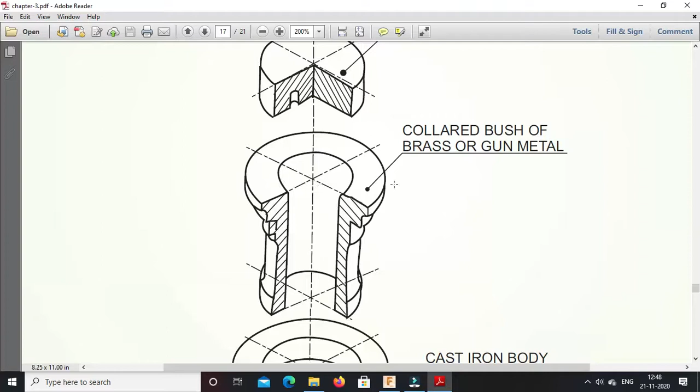So the next main part is the bush. Now in order to create a bush, generally a bush is a cylindrical part. If you observe, it is a cylindrical part having a central hole in it.

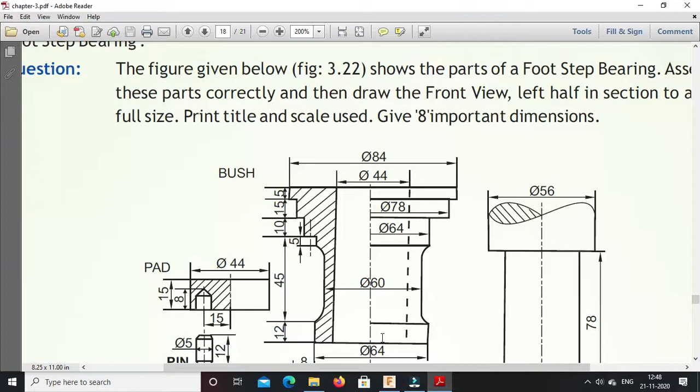There are two ways for creating this bush. Either you can use the step by step extrude option, similar to what we used for creating the body part - draw two circles, extrude it, then again draw two circles as per requirement, then extrude it again. So you can prepare the bush that way, with the diameter changing: 64, 60, then 64 again, then 78 and 84.

Or, if you are good with calculations, you can directly draw the half cross section of this bush and, using the revolve option, revolve that cross section along the vertical axis. Then you will directly get the bush in a single step, but for that you need to calculate every dimension - the thickness, small distances, vertical distances, and so on. So it will be difficult for me to explain that way, so I will use the extrude option for explaining purposes.

So we will go step by step. The initial diameter is constant at 44, the outside diameter for the base is 64, and the height is 12. Using the extrude option we will create the bush.

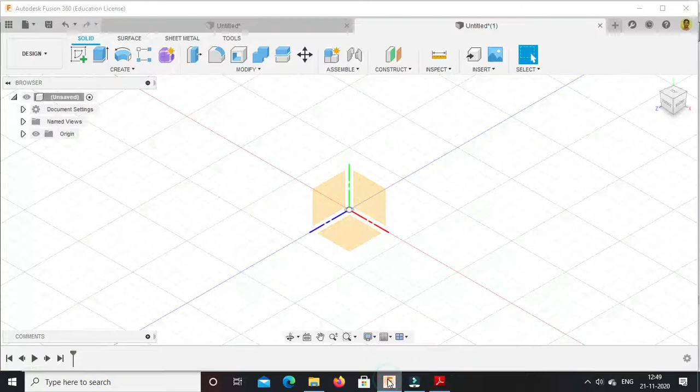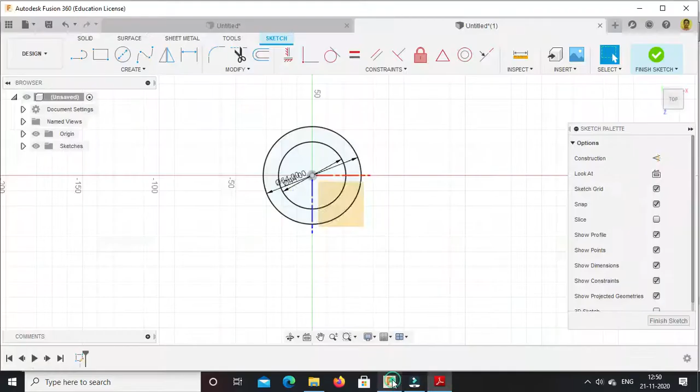Select this plane, go to create sketch option, select center diameter circle 44, enter, again draw outside diameter 64, press enter. The thickness is 12 for this part. So extrude it using dimension 12.

Press enter, then select this face, go to create sketch mode. Now inside diameter is 44, outside diameter is now 60. The thickness - since this 64 diameter goes up to this point, this much is 45 minus 5, so it is 40. So outside diameter 60, inside 44, and height is 40.

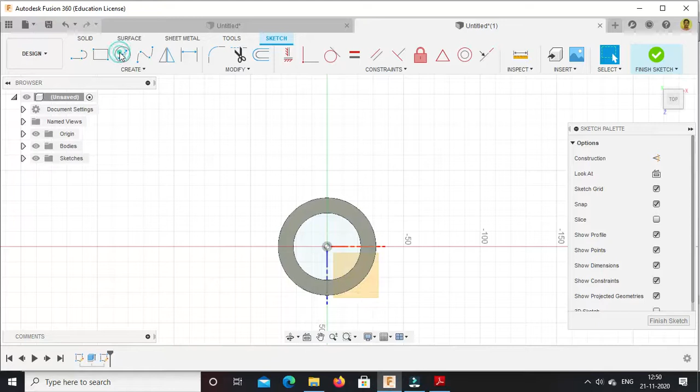So again give the outside diameter only, that is 60. Press enter, extrude, select this and 40.

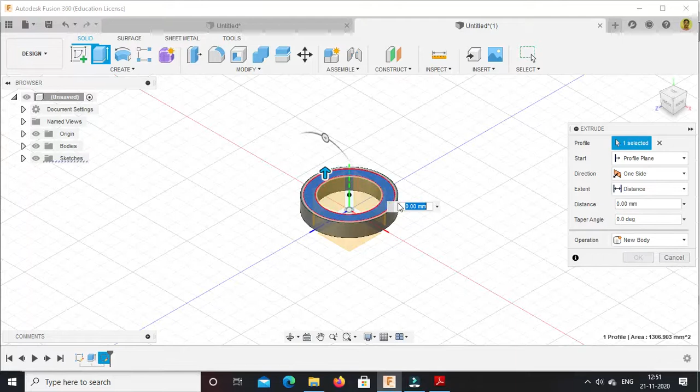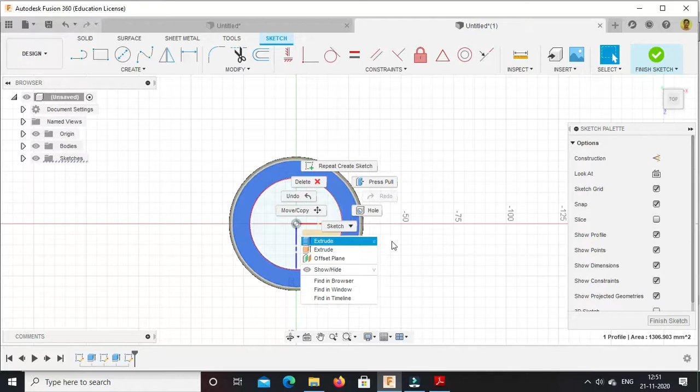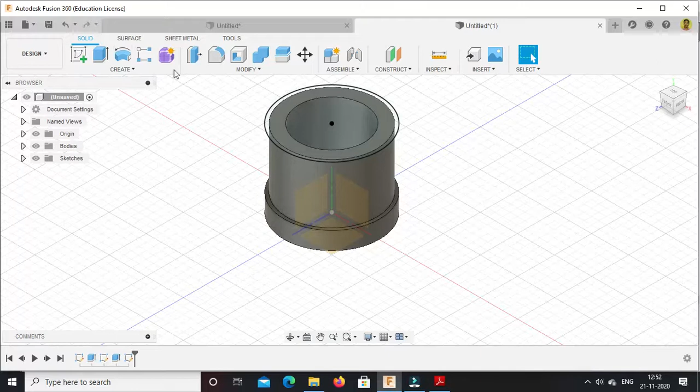Then select this face, create sketch option. Now diameter has increased to 64, inside is 44, and height is 10 plus 5, that is 15. We're already in sketch mode, so just select center diameter circle, 64, press enter, finish the sketch mode, extrude. Now select this portion and this portion also, and enter the height required, 15, press enter.

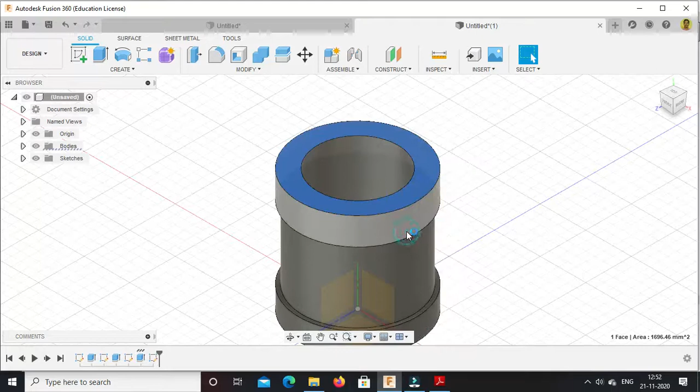Now the next one is 78 diameter with height 15, inside diameter is 44. So 78 by 15. Create sketch, 78, finish this sketch mode. Again extrude these two cross sections - you need to select and hide - enter 15, press enter.

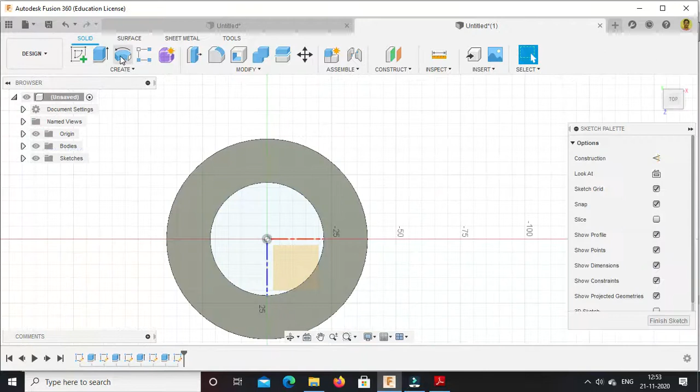The last part has diameter 84, inside 44, and thickness 5. Enter, finish the sketch mode, extrude this one with distance 5, press OK. So finally we have created this bush where the inside diameter is constant and the outside diameter is changing.

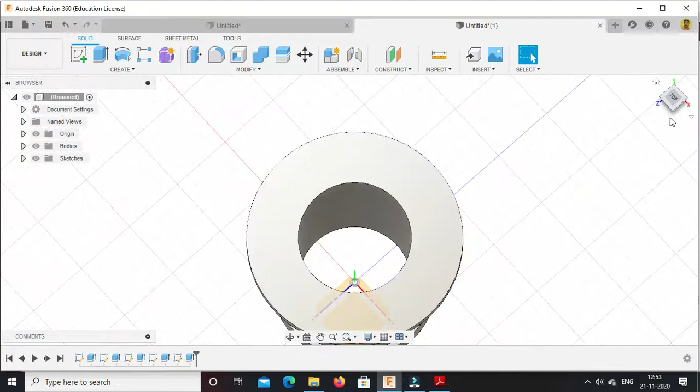So we created it using the extrude feature step by step. You can also create this using the revolve feature, but for that you need to calculate the exact cross section of the bush. Now the next part is, as we created one hole for the body, we need to provide a similar extension on the bush.

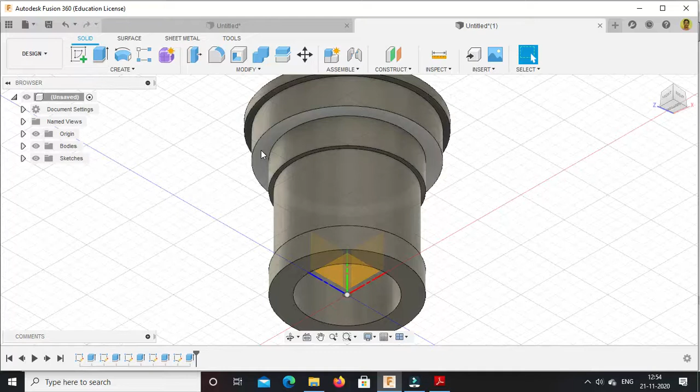The diameter is 5, so where do we need to provide it - it should be over here, with diameter 5 and length 10. So on this second face we need to draw. Go from the bottom, select this face, create sketch.

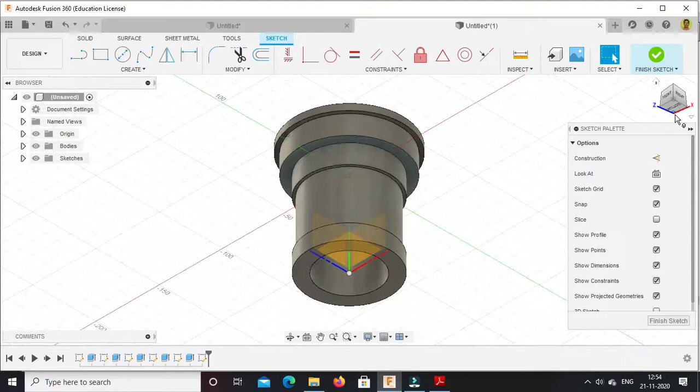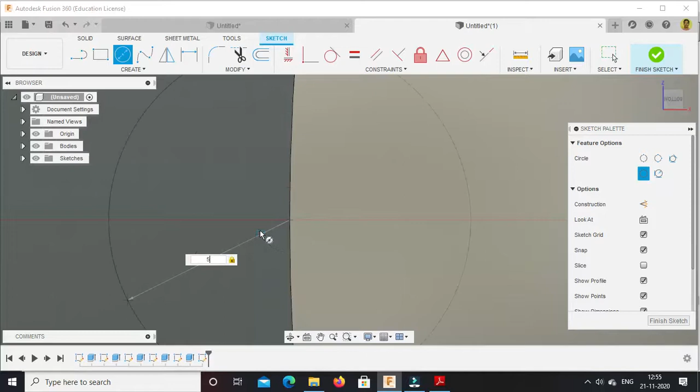Now we want to create it on this side, as per the orientation of the body. Select this point over here, just draw a circle, diameter is 5, press enter, finish this sketch mode.

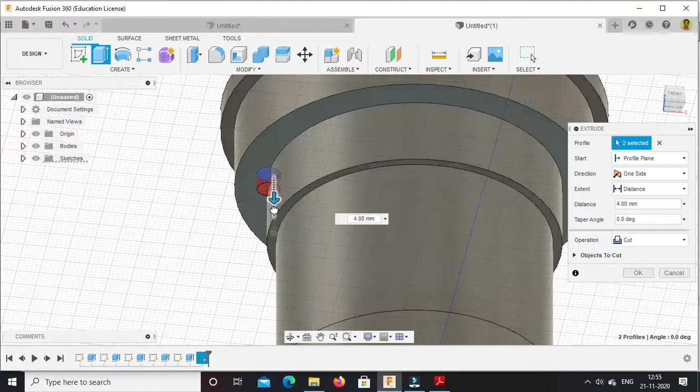Using extrude, select this and this, drag it, use operation as a join because we want it as an extension, and height should be 10, press OK. Now this is the extension that we have provided.

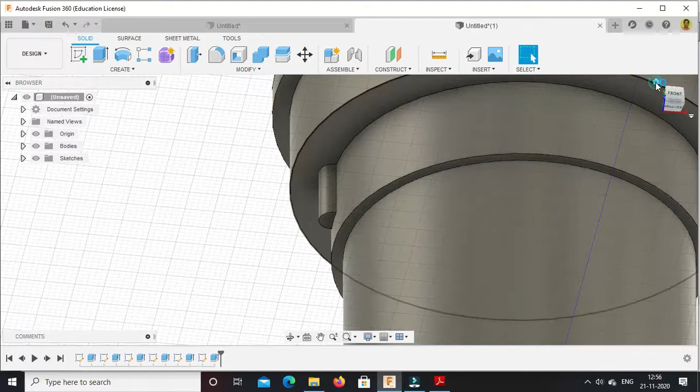Okay, so this extension will get fitted into the body which we have created, drilled hole in the body, and it will get locked inside that, so it will prevent the rotation of the bush in the body. Okay, so we have finished this bush. Now

next part is we will create this shaft. Okay, so shaft is simple, rotational symmetry is there, so you can prepare it using revolve option also. So diameter is 44, height is 78, again this 56 diameter is there, and length is not specified here as it is not expected, you can keep it as 20 also. Okay, so we will draw this cross section and using revolve feature we will create the shaft.

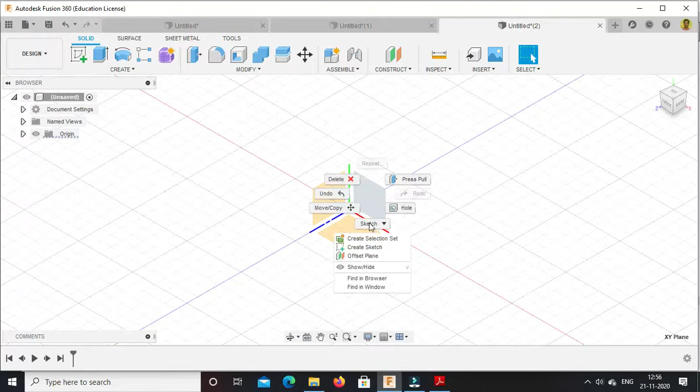Okay, so again go to next window, we will select this vertical plane as we are using revolve feature, create sketch. Now starting with this point we will use line option, so using line command start with this, so the diameter is 44, so this much width will be 22, then height is 78 for the shaft,

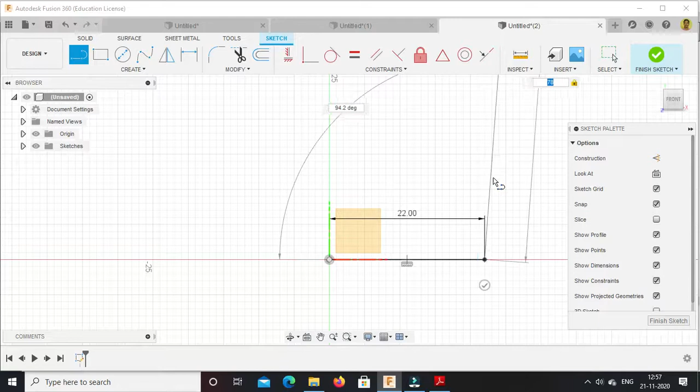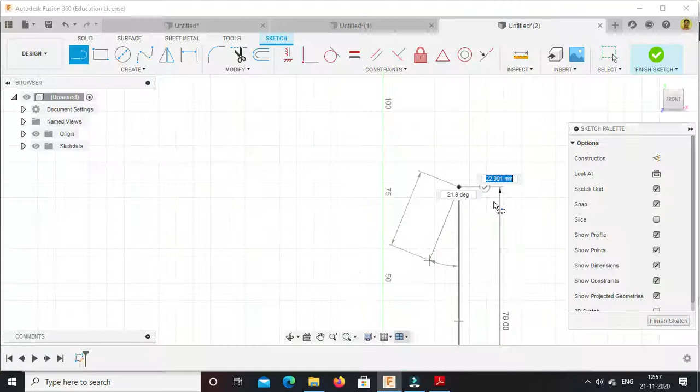now again diameter is going to increase. So here it is 56. So radius is 28, I think. Okay, so 28, we have already done a distance of 22 here. So 28 minus 22 is 6. So we will move on the outer side or outward by distance of 6 mm. Okay, and then again 20 distance, press enter.

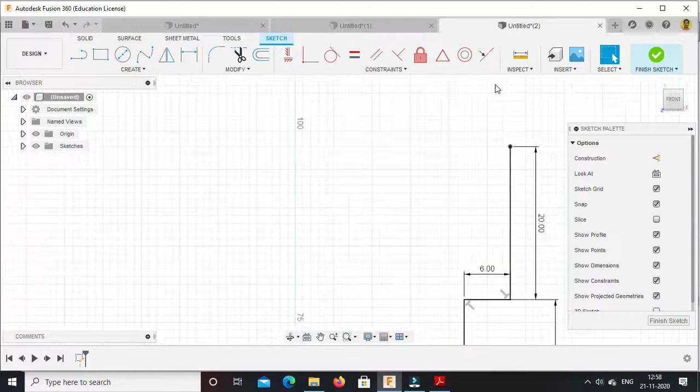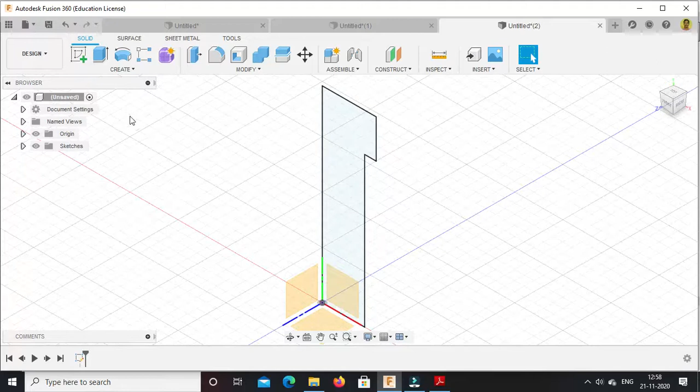Again we will use line, then we will come to this start point and then we will join this with the initial point. Okay, finish the sketch mode. Now using revolve option, cross section already selected, axis, y axis we have selected. Okay, so directly we have created the shaft.

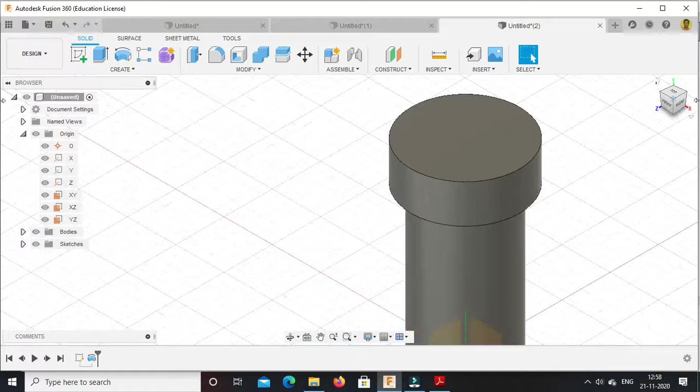You can also use extrude feature in 2 steps, first of all creating this cylindrical portion and then this cylindrical portion also. I have created this using revolve feature. Okay, the next part: we have created this body, then bush, then shaft, then this pad is remaining and pin is remaining. Okay, so we will create a pad.

So pad is simple, just a cylindrical disc of diameter 44 and 15 mm height. Okay, and on the bottom side it is having one hole of diameter 5 mm and at a distance 15 mm. Okay, thickness of that hole inside the disc is 8 mm. Okay, so we will create first of all that circular plate 44 by 15.

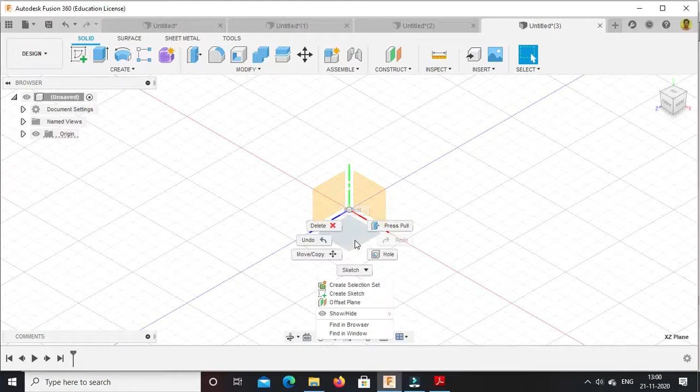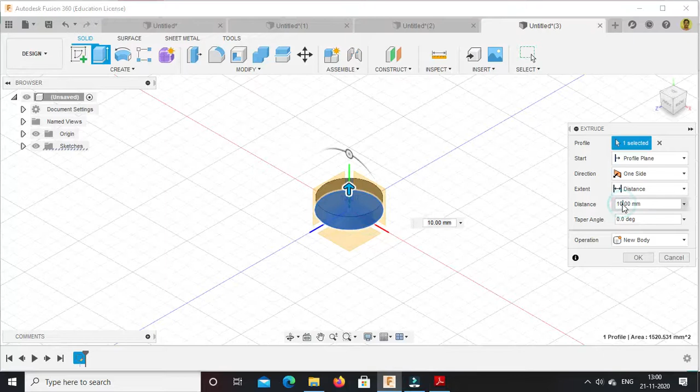Again go to next window, origin, all the planes visible. Again we are using extrude feature, so go to horizontal plane, create sketch, center diameter circle 44, enter, finish the sketch mode, extrude it by 15 mm of thickness, I think, yes, 15 mm. So 15 over here, press OK. Now on the bottom side we want to drill one hole.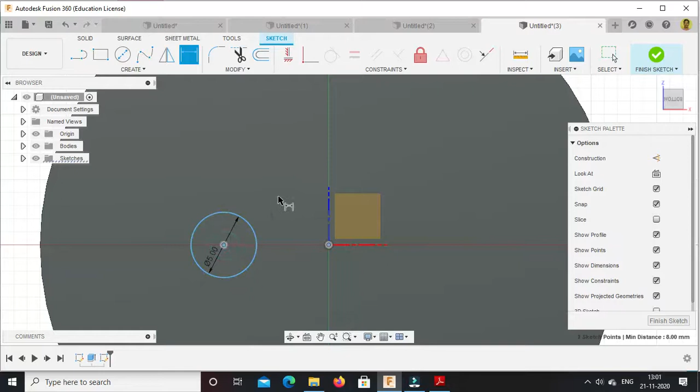Select this face, create sketch. Now drill one hole over here of diameter 5 mm, press enter. Center of that circle is located from this center to this center, distance is 15, press enter. It is correct, yes it is 15, and depth of that hole is 8 mm. Okay, so finish the sketch mode,

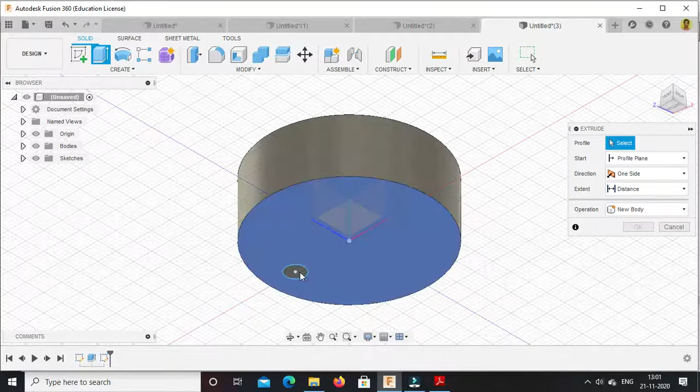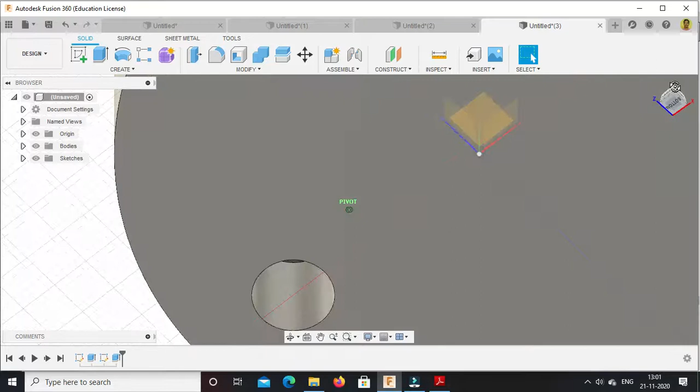extrude, use this, we want to cut it, reverse the direction, cut operation, and distance is -8. Okay, press OK. So this hole is created inside the bottom surface of the disc. So that's it for the disc, and last part which is remaining is nothing but what?

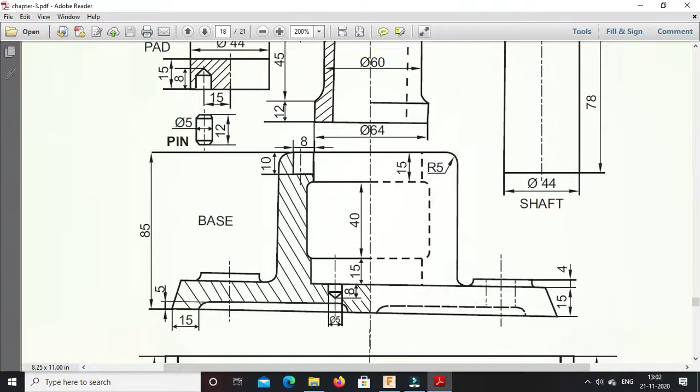Pin. Okay, so this 12 is there, diameter 5 is there, but instead of keeping this height as 12, we have created here 8, and in this body also 8. So we will make the height of the pin as 16. Okay, and diameter is 5. So just a cylinder of diameter 5 mm and length 16 mm.

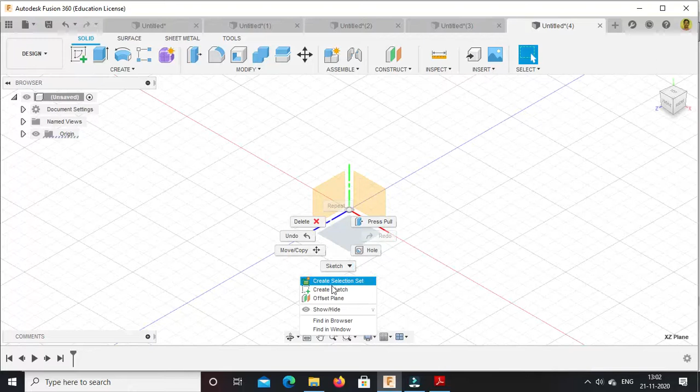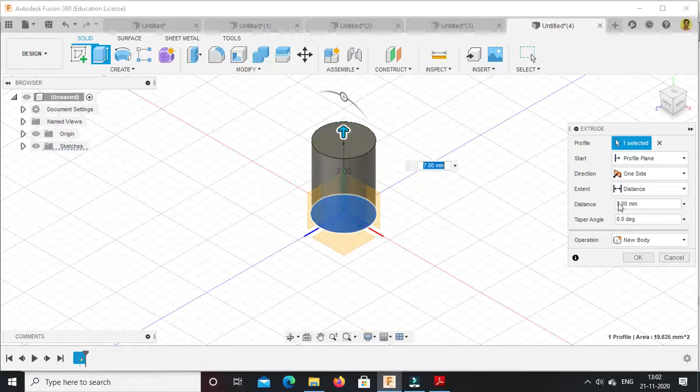Okay, so again go to next window, origin, again horizontal plane, create sketch, draw diameter of 5 mm. Here height is 16 as per the requirement.

Press OK. Now we are going to assemble these parts, not in this video but in a future video I will show you how to assemble all these parts together. So for that purpose we need to create body, or sorry, not body, component. Okay, so just keep in mind that while saving, right click on this bodies option, this body one, right click and create components from the bodies.

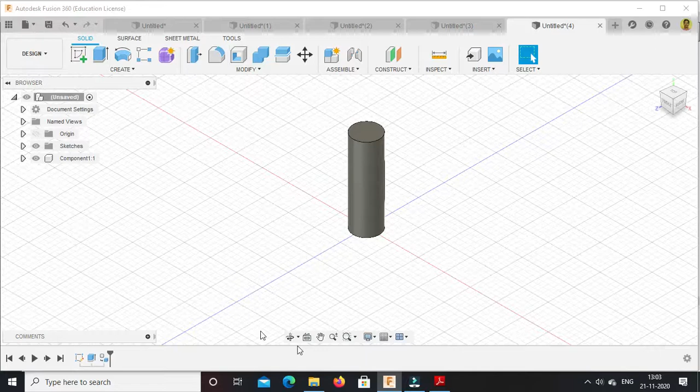Okay, why it should be component and not body, I will explain while preparing the assembly. Okay, so we have created all the parts. So repeat this procedure for all the parts, that means create a component from each part. Okay, and we will use it while doing the assembly.